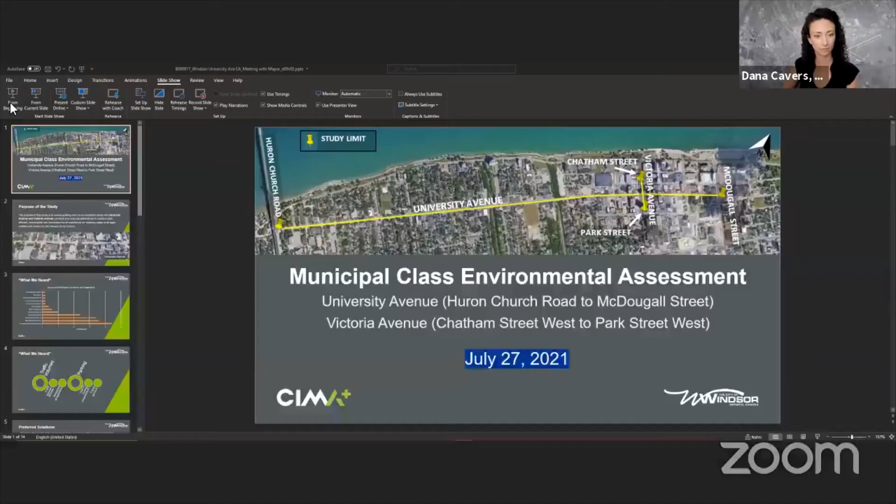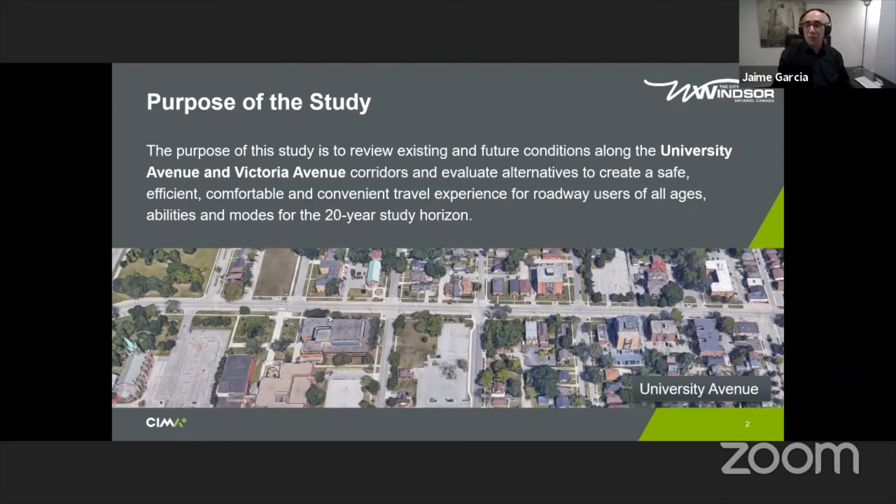As Jeff said, the intention of this assignment was to identify what are the opportunities to change the existing configuration of University Avenue as well as Victoria Avenue to allow all modes of transportation to have the same level of service. During this assignment, we introduced different alternatives to the public and stakeholders to provide us information about what they want to see at the end of this assignment. What we heard from them was very direct indication that protected bicycle lanes should be a must in order for any kind of changes to take place on these corridors.

Similarly, identification of traffic volumes and parking that may affect these modifications was also requested from stakeholders and agencies.

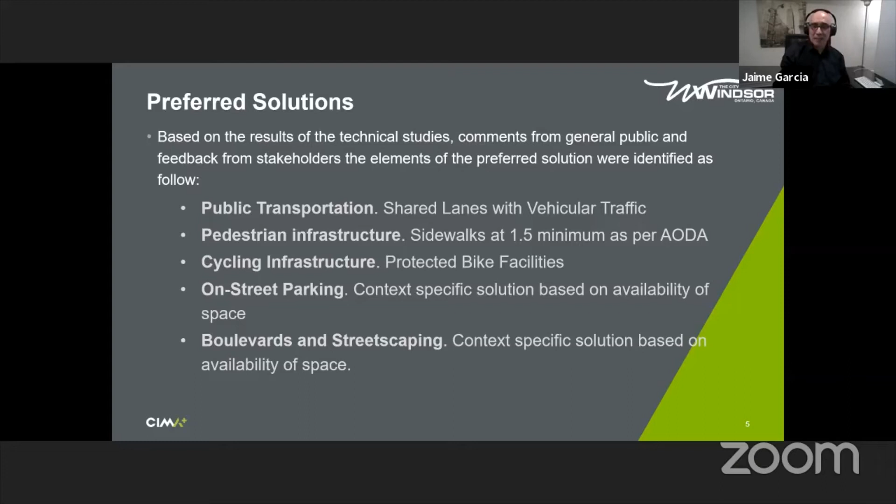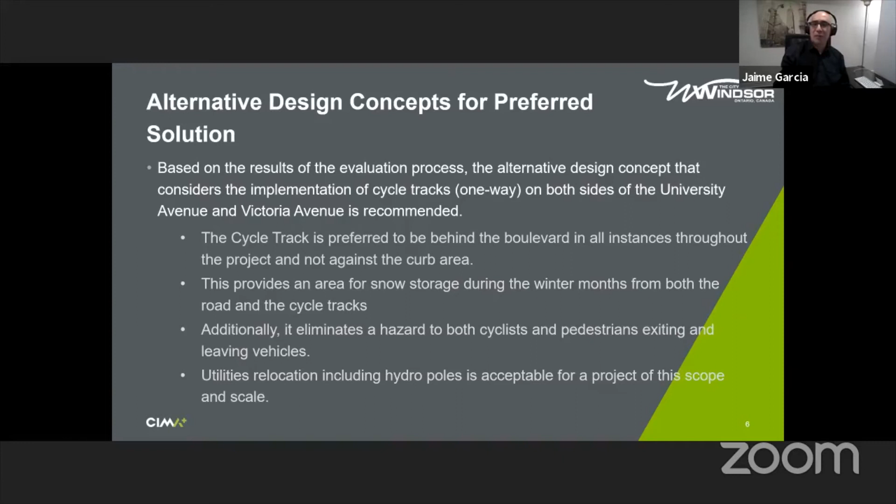At the end of this preliminary analysis, the following activities and purposes of the corridors were identified: public transportation with shared lanes for vehicular traffic, pedestrian infrastructure to support the AODA requirements, cycling infrastructure based on protected bicycle lanes, on-street parking where possible, as well as beautification of the pedestrian realm with boulevards and streetscaping. An important part of this analysis was the determination that the cycle track should be behind the boulevard in order to facilitate the movement of pedestrians and cyclists, and protect them from vehicular traffic movements.

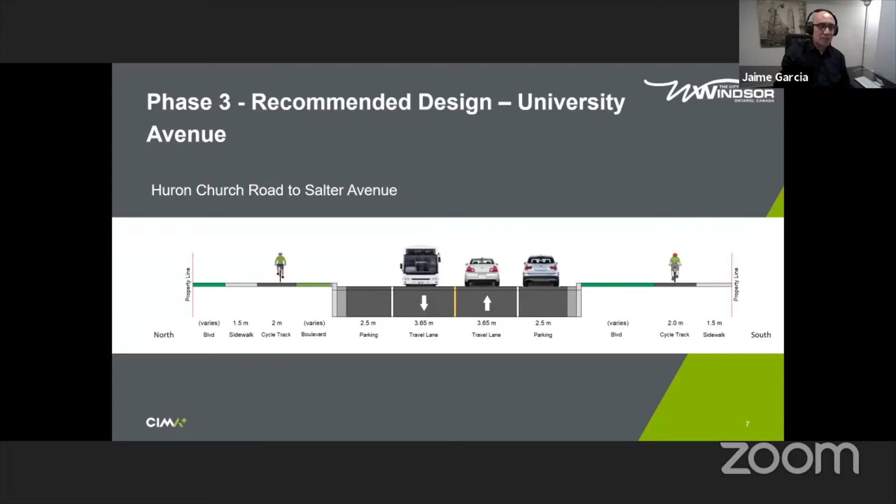So this is the main result along the corridor. What you see here is going to be expanded as part of the PIC that we are going to conduct tonight, but this is just a schematic description of the new cross-section and corridor on University Avenue. As you see, two lanes are going to be maintained with parking, a space for boulevards, cycle tracks, and sidewalks. How it's going to look all depends on the location of the boulevard. For example, if we have space, you will see a streetscaping area for utilities, also more trees along the corridor, and importantly, the cycle track will be raised, meaning that driveways will be at level with the cycle track.

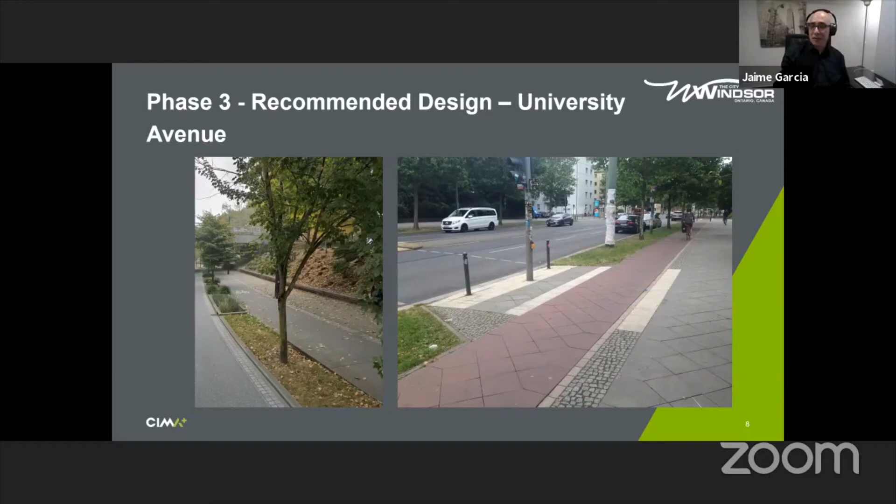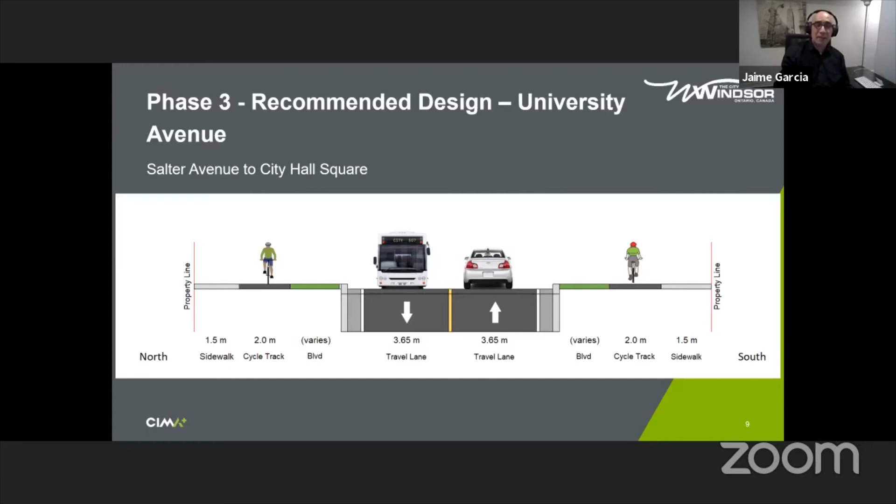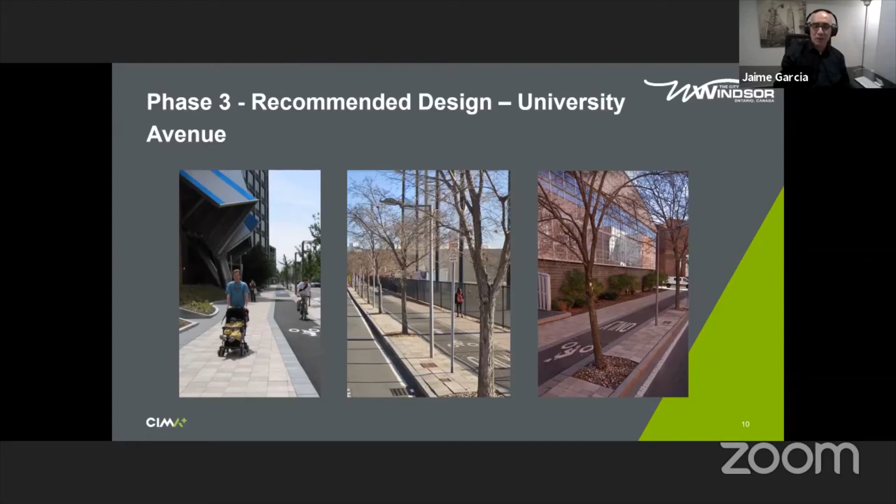In areas in which we don't have adequate cross-section to facilitate all of this, parking will be restricted, but the two lanes, one lane per direction, will be maintained. Probably it's going to look like this. Of course the spaces will be reduced, but all the amenities will be there.

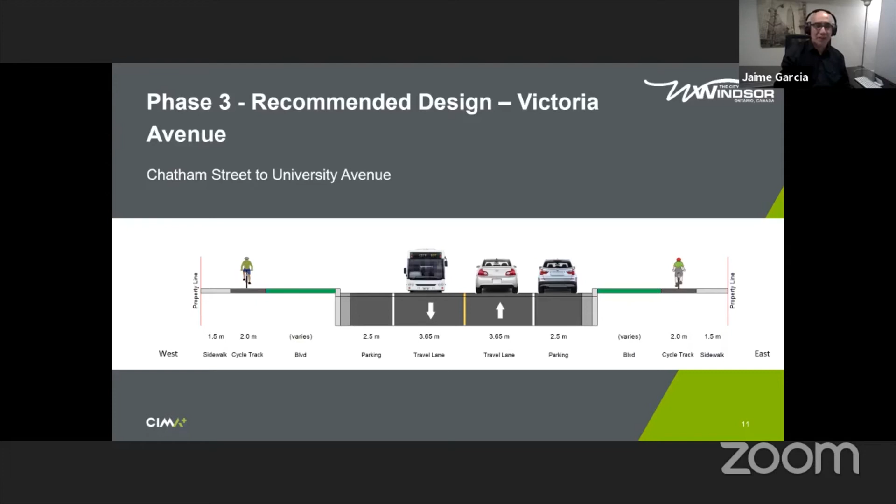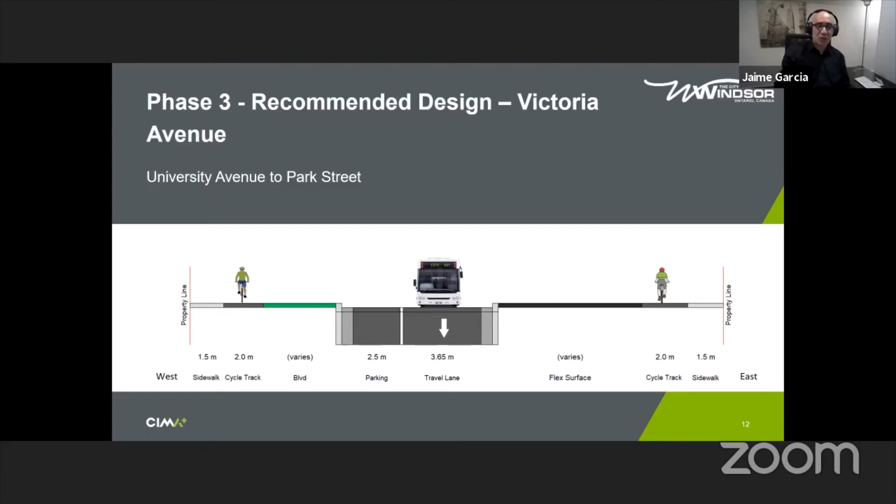Finally, Victoria Avenue is just the section between Chatham and University Avenue. What you are going to see is something like this, showing two lanes, one per direction, north of University Avenue with boulevards on both sides and the cycle tracks. An interesting option is the one south of University Avenue, in which Park Street will be included at the intersection with a flex surface. This is something that is going to be explored as part of detailed design, but probably it's going to look like this, an area in which amenities and parking will be provided on a regular basis.

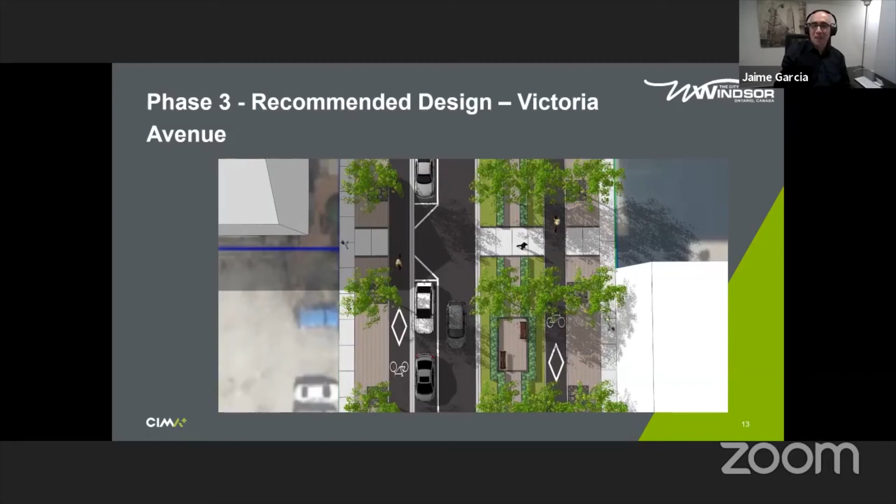And that's for me. I'm going to transfer the material in just a moment to the mayor, after indicating how the public is going to provide comments. I strongly suggest attending the meeting tonight in which more information will be provided about these results, but the intention is to have an opportunity for the public to provide those comments before finalizing the environmental study report, probably before the end of the year.

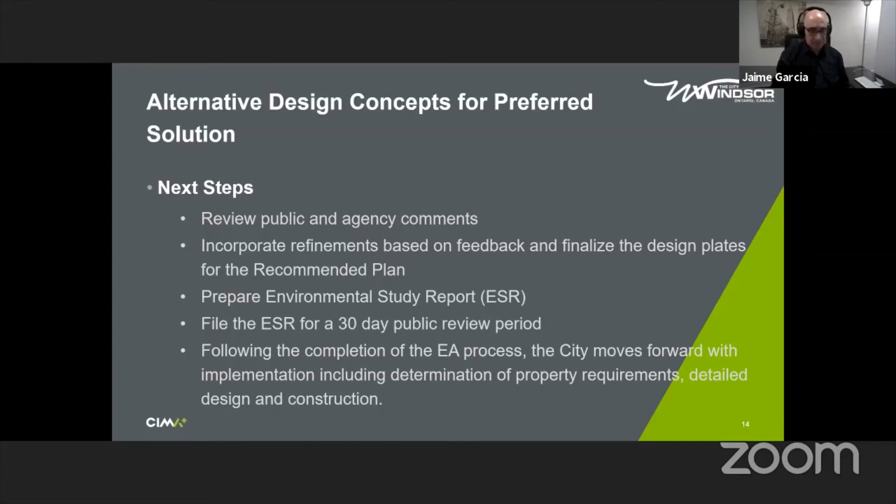Well, thank you very much, Jaime and Jeff, for the presentation. And remember, everyone, the public, the second public consultation meeting is being held online tonight from 6 p.m. to 8 p.m. I certainly encourage residents to join the meeting if they'd like to hear a more detailed presentation of this environmental assessment.

We also look forward to receiving your comments and suggestions about the proposed plan until August 24th. For information about how you can join tonight's meeting or how to submit feedback, visit our website, citywindsor.ca, and in the search bar, type in University Victoria PIC or Public Information Center. If all of that fails, pick up the phone and dial 311.